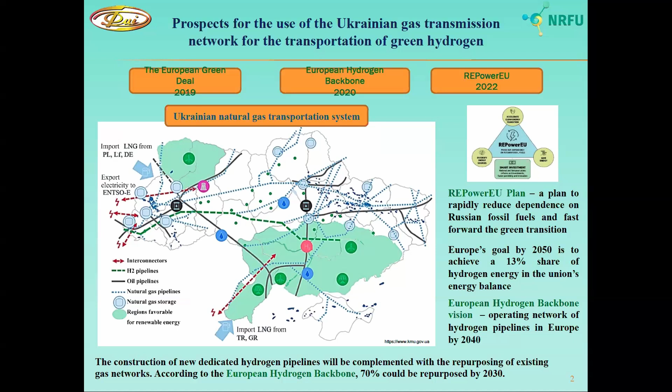However, such a prospect can increase the risk of structural integrity loss, and the main issues are in-service degradation of long-term operated pipeline steels, and also a potentially harmful influence of hydrogen on mechanical and corrosion properties. A significant part of pipelines is near the end of their design life, and in-service degradation implies embrittlement and deterioration

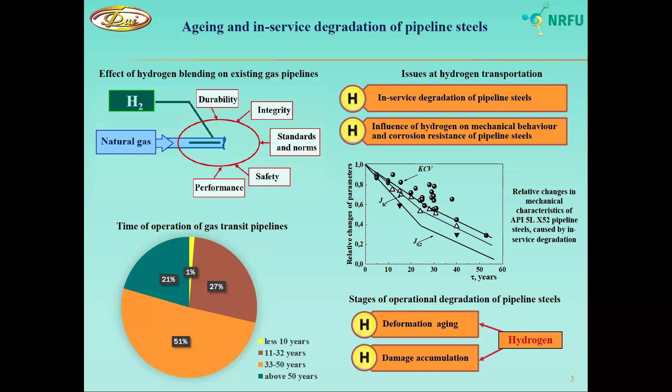of mechanical properties. So based on our previous results, two main stages of in-service degradation of pipeline steels were distinguished: deformation aging, and also in-bulk material damage accumulation. And it was also demonstrated that hydrogen plays an important role in accelerated degradation on both stages.

So a long-term mutual action of corrosion, hydrogen charging, and the mechanical working stresses facilitates development of damages at the nano and micro scales, and accelerates degradation. Therefore, it's important to know the current technical state of steels on certain branches of pipelines, and also to assess the sensitivity of operated steels to hydrogen action.

So the aim of the study was to assess the susceptibility of low carbon pipeline steel of a natural gas pipeline to internal hydrogen embrittlement, taking into account long-term operation and the intensity of hydrogen charging.

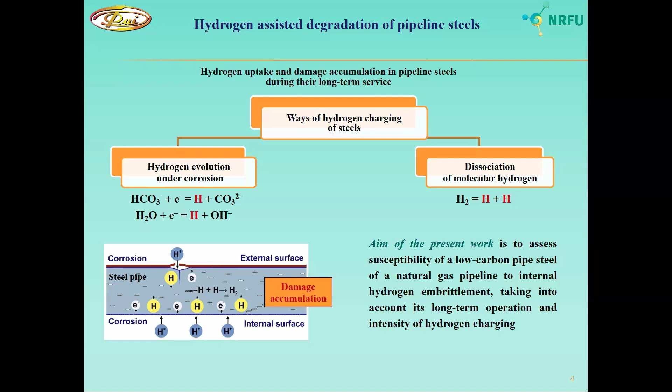So the material under study was a low carbon pipeline steel with X52 strength grade from two pipes after 38 years of operation on a gas transit pipeline in Ukraine, and for comparison, an unoperated reserve pipe of the same steel grade. Both pipes have the same diameter and wall thickness. Specimens cut out from these pipes longitudinally and transversely were subjected to characterization, hydrogen charging, testing, and analysis.

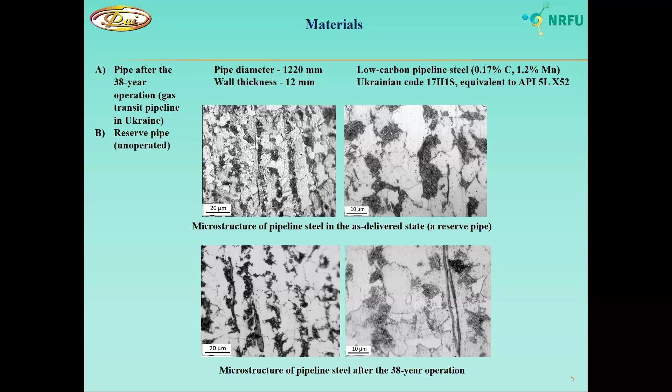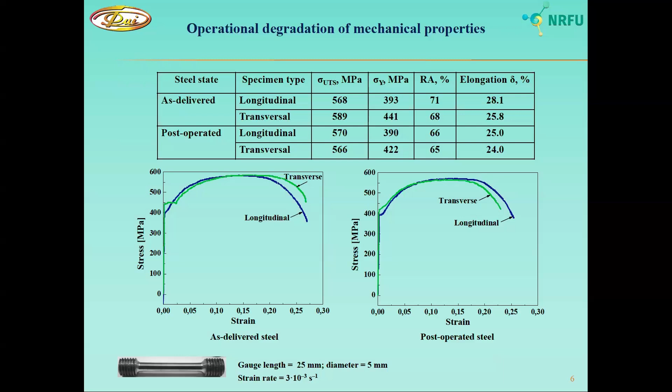Anisotropy of mechanical properties for all pipeline steels is a well-known phenomenon, and it's important to know whether long-term operation influences the anisotropy of mechanical behavior. Based on the presented data, anisotropy of basic mechanical properties is insignificant for the studied steels, and the higher strength in the transverse direction compared with the rolling one is commonly observed for all steels. In this case, we have similar mechanical behavior, except that for the operated steels, the ultimate strength is the same in both directions.

The plasticity characteristics for the operated steel are somewhat lower than for the as-delivered one, indicating operational changes in the material.

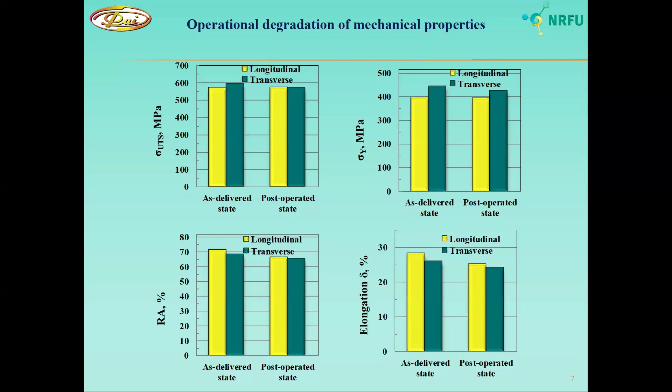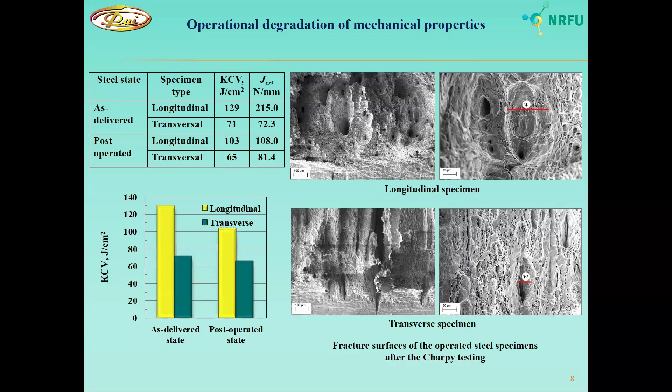To study hydrogen influence on steel microstructure degradation, specimens were subjected to electrochemical hydrogen charging under different modes, moderate and intensive, using different cathodic current densities, which differ 20 times. And also duration of cathodic polarization was 120 hours, high enough in order to ensure a more uniform distribution of hydrogen in a cross-section of specimens.

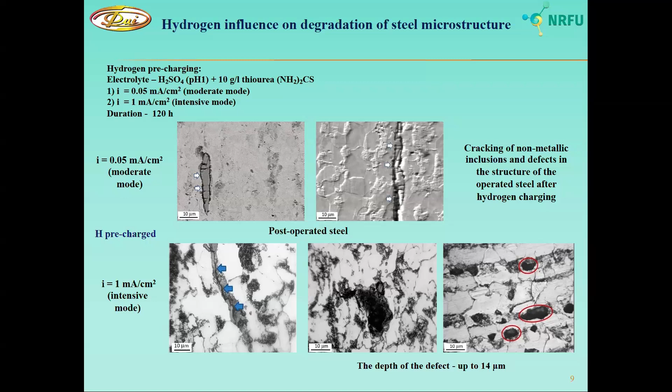So analyzing microstructure after hydrogen charging, we can see cracking of non-metallic inclusions for the operated steel, and also all non-metallic inclusions have at least a partial loss of cohesion with the matrix. And after intensive mode of hydrogen charging, also cracking along the boundaries between non-metallic inclusions and the matrix was observed, and complete decohesion of non-metallic inclusions from the matrix formed defects in the steel.

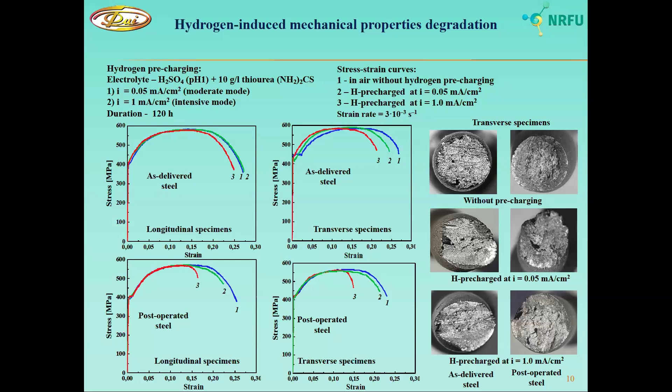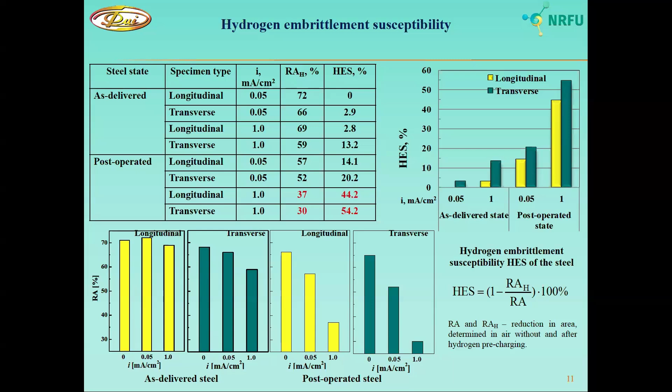And for the operated steel, we can see that it is sensitive to hydrogen embrittlement under both modes of hydrogen charging, especially for the transverse specimens. And also it should be noted that under intensive mode of hydrogen charging, the susceptibility of the operated metal to hydrogen embrittlement is very high.

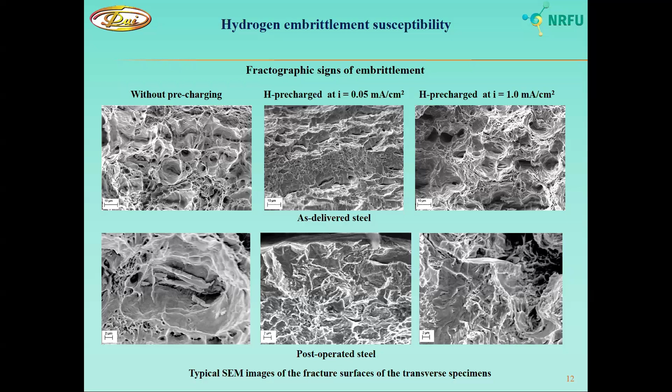And also, this project is focused on the Ukrainian gas pipeline. However, these findings can be also extended to other pipelines sharing similar operational conditions and safety requirements.